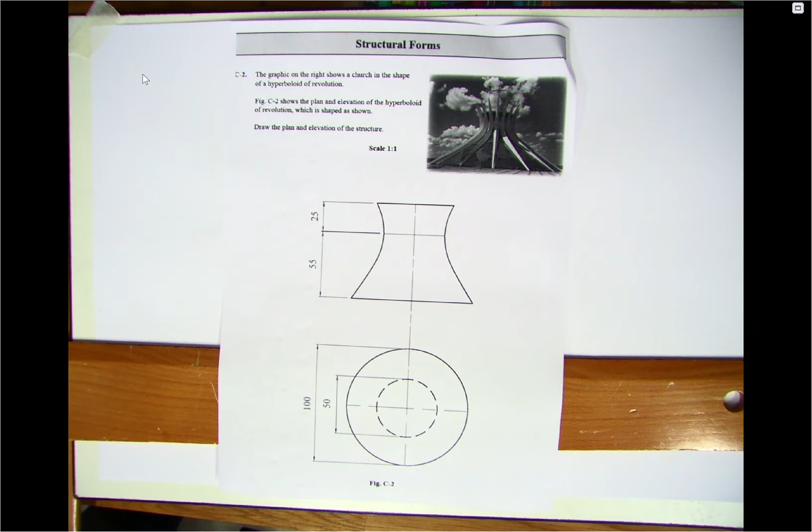Okay, so this is today's question. It's again a hyperboloid of revolution. It's an ordinary level standard one typically, but this is quite common at higher level in that they give you a hyperboloid of revolution that doesn't go up the full way. It's been cut off or it's slightly shortened. There's a few common mistakes that people make. So we'll start off anyway.

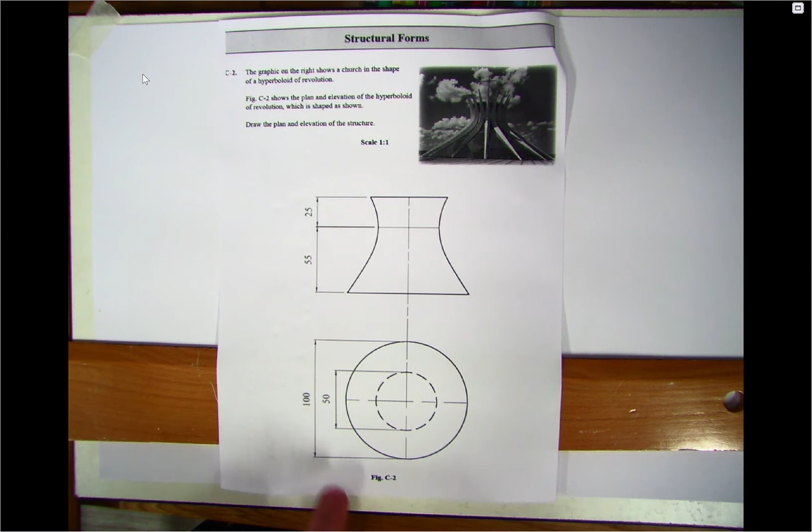We have 50 here for our hidden circle or throat circle. We have 100 here for our outside circle, and we're also missing a circle here, which we'll come back to and make sure that we don't forget to put in at the end. So obviously half of 50 is 25, so we need radius 25, and half of 100 is 50. So I suppose we'll do the bigger one first.

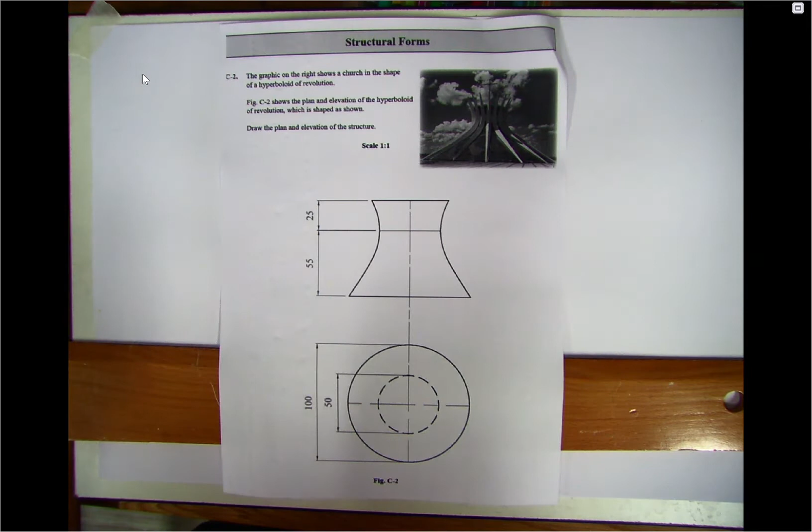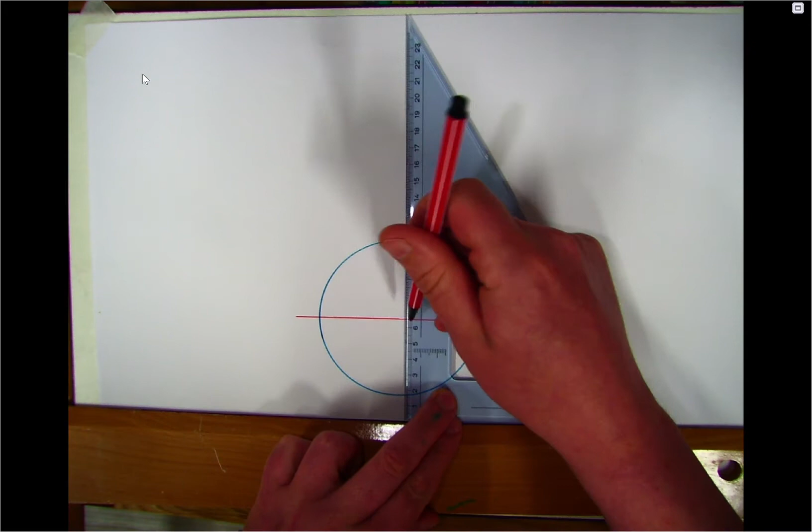So here I'm just setting my compass at the back to 50. Okay, so we pull it about here, and let's zoom in after that. Okay, so there's my center point, so I'll draw my crosshairs. Okay, and then we set it to 25, and we'll draw our hidden detail.

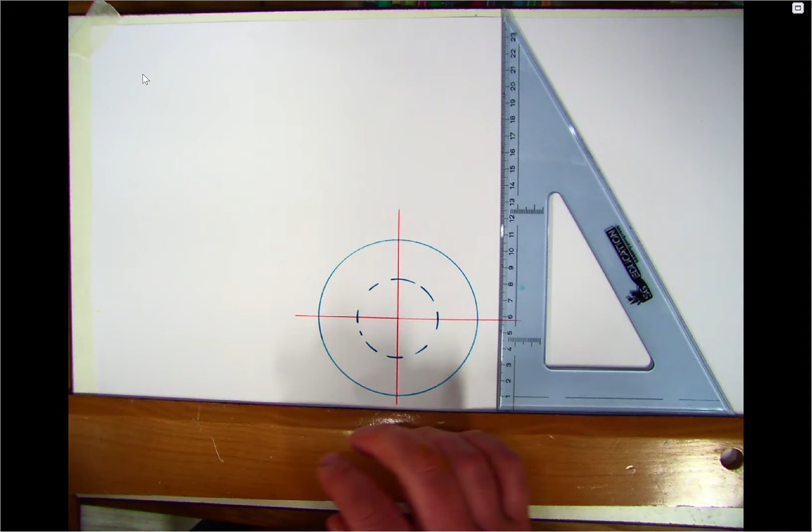Now we know from the plan view that this is hidden detail at this stage. So what we'll do is we'll try to get it as accurate as we can and make sure that they hit the two edges of the crosshairs on left and right so that I can bring up those points. So the most accurate way to bring this up is by using the outside edges.

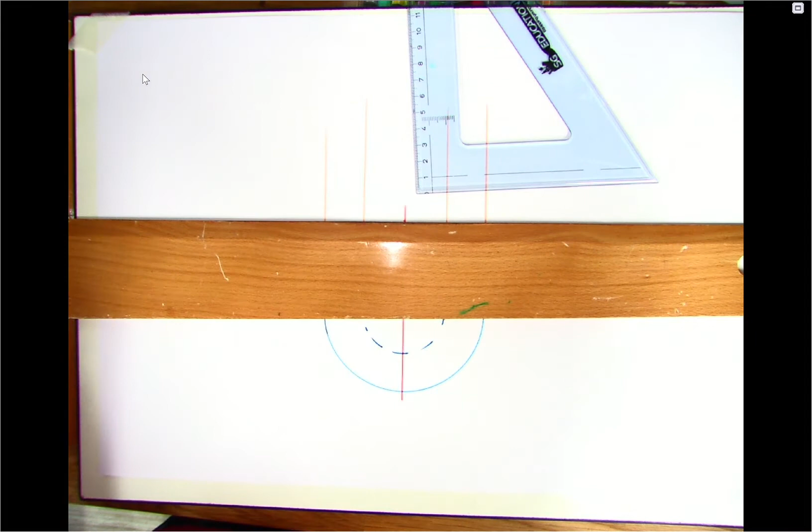Okay, so typically what we do is we draw the plan first and then we draw this too. So we're going to leave a gap of maybe about 10 there to draw my ground line, and then the heights that we have are 55 and 25 in this case. Okay, and 55 and 25 is 80. So what I'll do is I'll draw that there. I'll just do that much first.

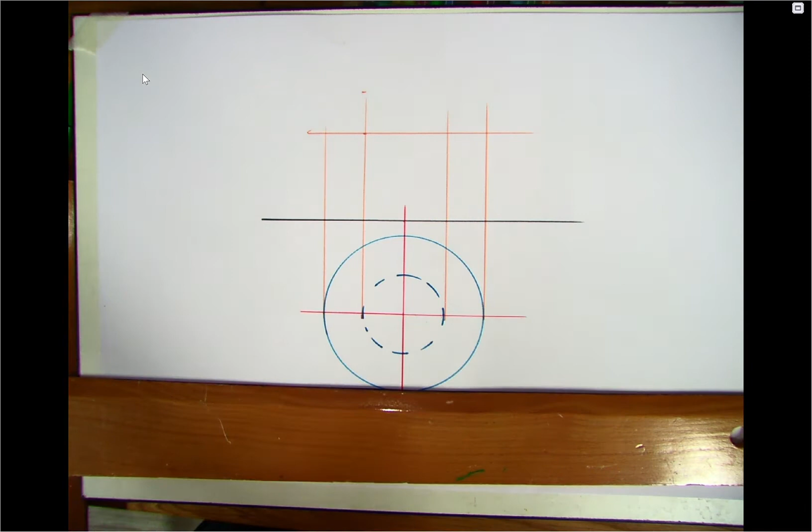This is my mark for my top part, so I'll just explain. There's various ways of doing this, so I'll try to explain all the different ways. So if I look here, basically I should have a gap of 25 here. So because it's even, I wouldn't use the dividing line method. However, especially if this is higher level, I probably would just do it on one side just to show that I have it done. But for today, we're not going to do it just to speed up the video a bit.

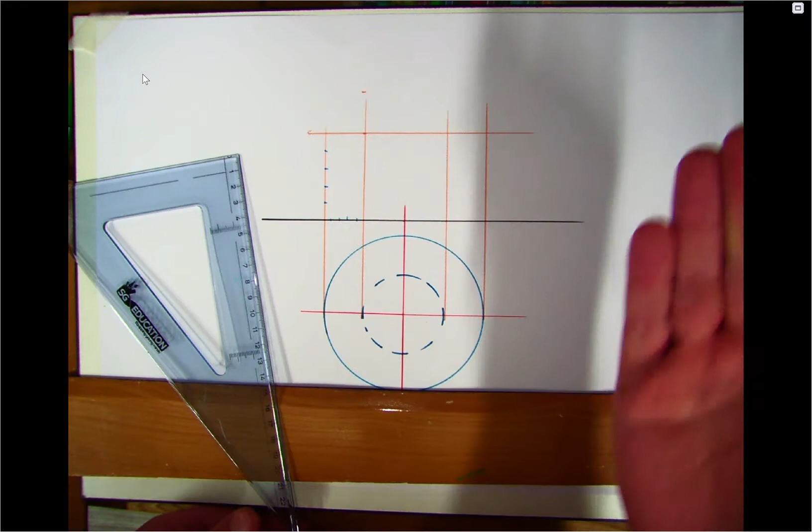So 5, 10, 15, 20 this way, and then this is 55 high. So again, 55 divides evenly by 5, so it gives us 11. So again, it's 11, 22, 33, 44. Again, I'd probably use the dividing line method on one of those sides just to show in case there'll be a mark for it. But basically, this here now is my V1 and my V2 point. So this point is important and this is important.

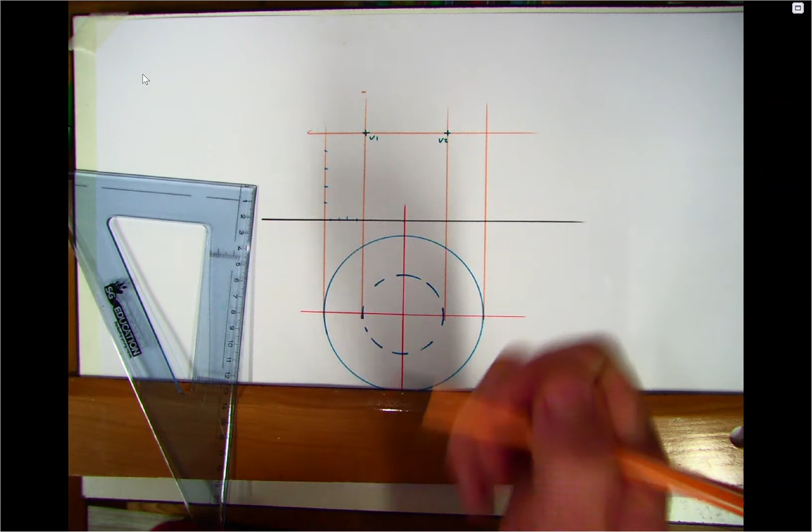And one of the important things here is this is the rectangle that you're using. Often students accidentally try to split the whole bit here. Now, what I would usually say, as you've heard me say in class, is that I've never really thought about which one goes to which, because if I accidentally join these to V1 and join these to V2, they won't cross. So it must be the other way around. It must be these going to V2 and these ones here going to V1.

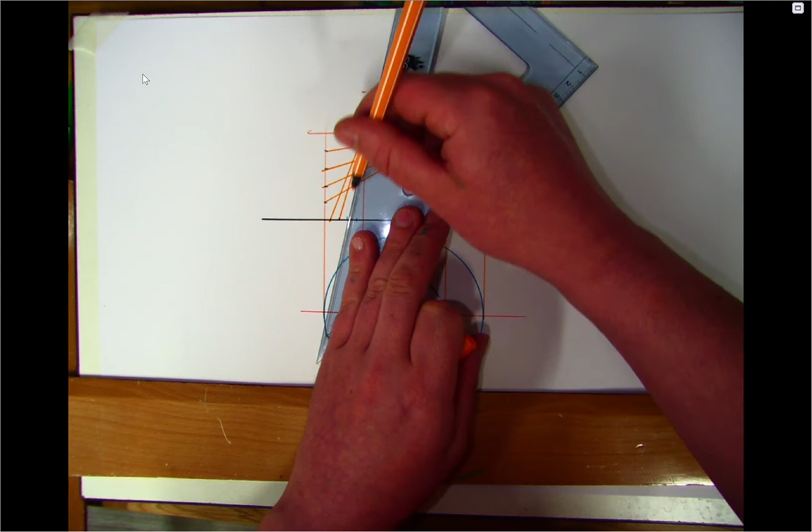So this is the rectangle method for doing a hyperbola. There are two alternative methods for solving this, but this is the one I think is quickest and easiest, and usually it's the one students pick up the handiest. So I'll mark my various points so I can number these 1, 2, 3, 4, 1, let's see, that's wrong, 4, 3, 2, 1, so 1 and 1 cross giving a point, 2 and 2, 3 and 3, 4 and 4.

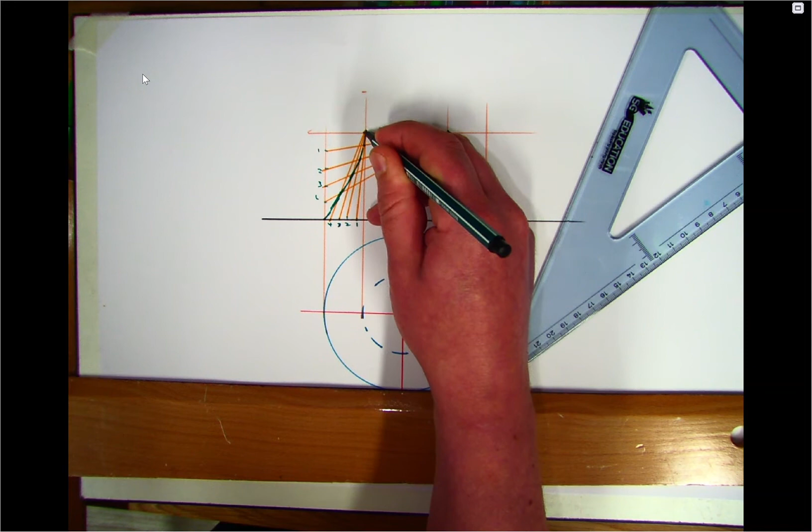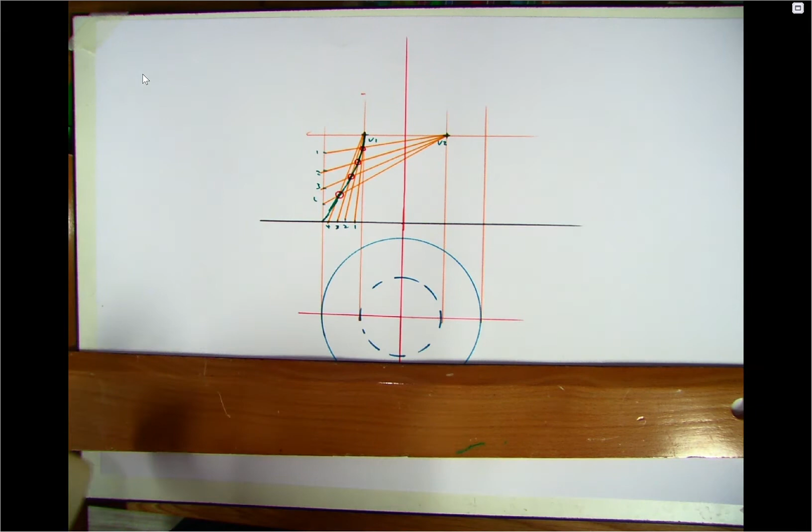And that's like that. Okay, so I might just highlight these points here because I want to show them for my other side. Now, there's a few different ways in terms of solving. I could repeat the same on the opposite side. However, what I could also do, sorry, let's put a bit more tape there, is I could mirror across. Basically, a hyperboloid of revolution is exactly the same on the top as the bottom and exactly the same on the left as the right. So I'm going to just draw these lines here, up and straight across.

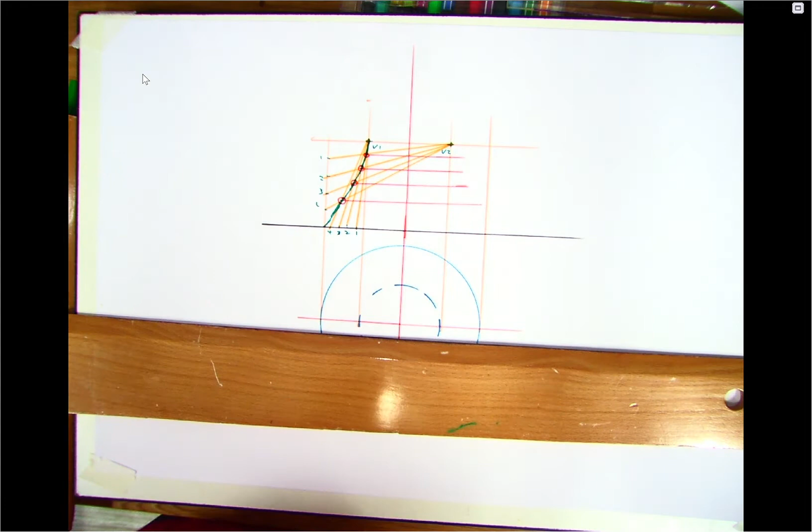Okay, and the reason the mirror method is good to get used to is because it can be used to solve the top part in this case, particularly if the question isn't even. So that's the same distance on this side. As I said, this is completely up to yourself. You could use the same method as we used on the left hand side on the right hand side. No problem with that.

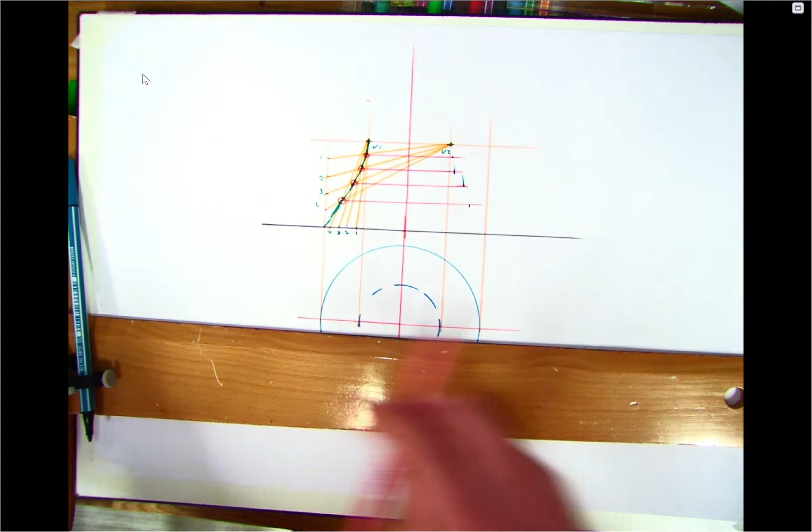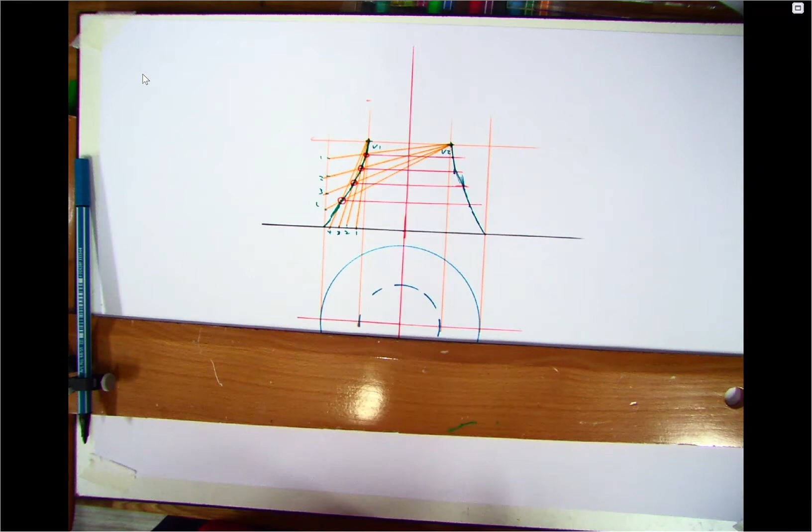Okay. So we have our various points there, and now we can sketch this in. Okay, so the reason I showed that is because pretty much to solve the top, that's what you need to do, right? So I'll show you slightly in this corner an alternative way of solving the top, but it would take up more space. So we knew that if we came up 25 more, that's going to be the top of my hyperboloid. We'll draw a line for that there.

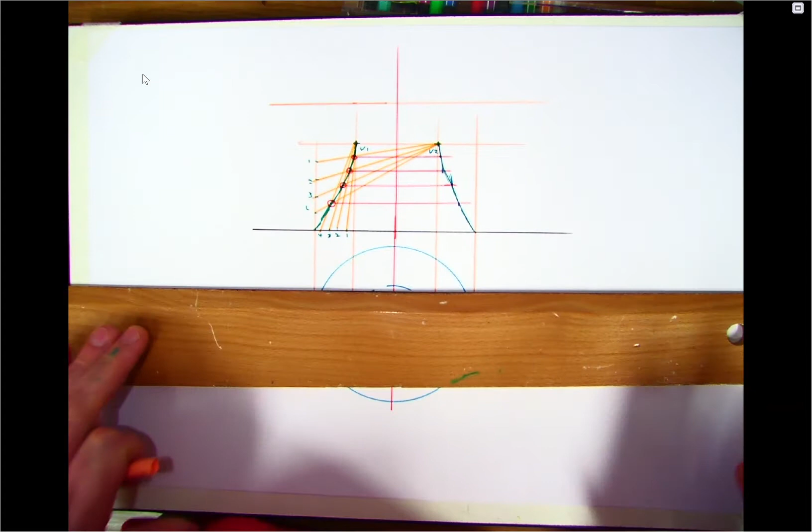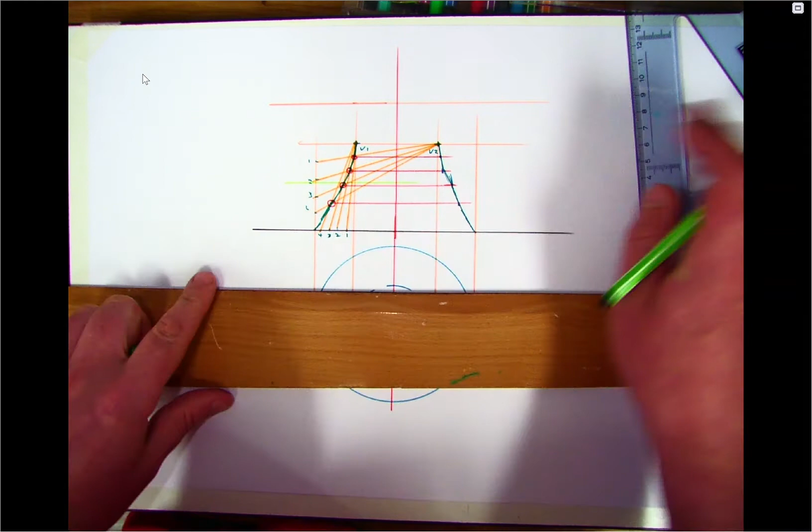So if we came up 25, we actually need to know the exact point here. So what they would expect me to do in the exam is also come back down 25. So I have to draw a line here. Right? So that gives me that point there. And if I bring that up, that gives me the exact curve. So my curve is literally going to be sketching from there to there, but I have to show that I found the point in here to get full marks for that part there.

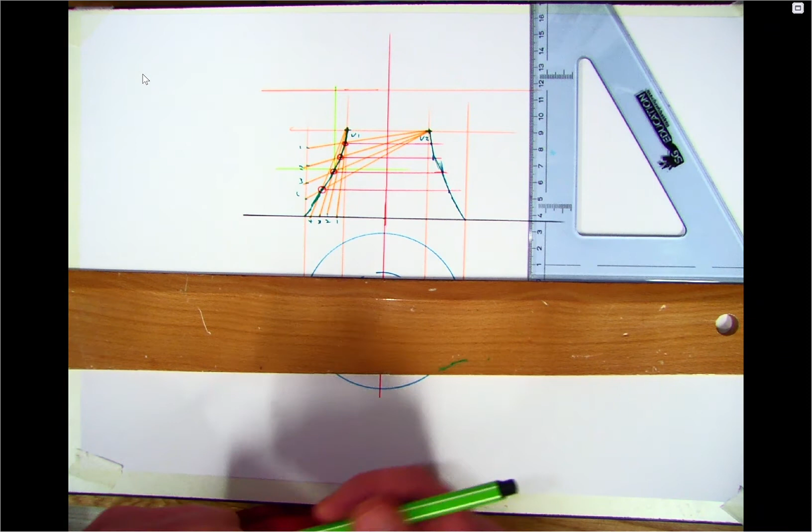So what I can do actually at this stage, if I wanted to, that's going to be the outside edge. So one of the lines that is missing in plan, and this is the top of the surface. So I can draw that and you'll see that in a second. If that's a little bit confusing for the minute, don't worry about it. So really all I need is another 2 points. So I have this one and I have this one. And again what I'll do is with my compass, let's see if that one might not be up high enough. With my compass, I'll take my distances.

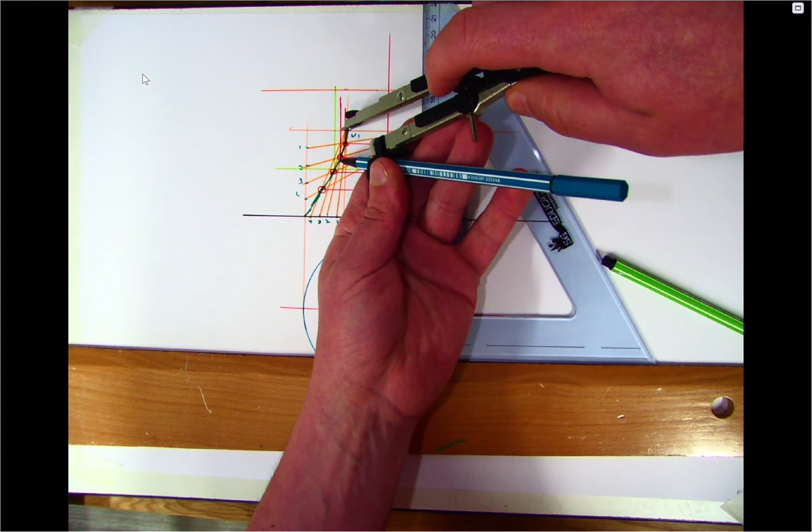And again, because it's a mirror image on the top, there we go. There we go. So now I have all my points for that side. I can sketch that in. And again, the examiner would be expected to see that. And there's my left hand side completed. Okay, so I mirrored these up. As I said, I couldn't use this method, right, as it stands.

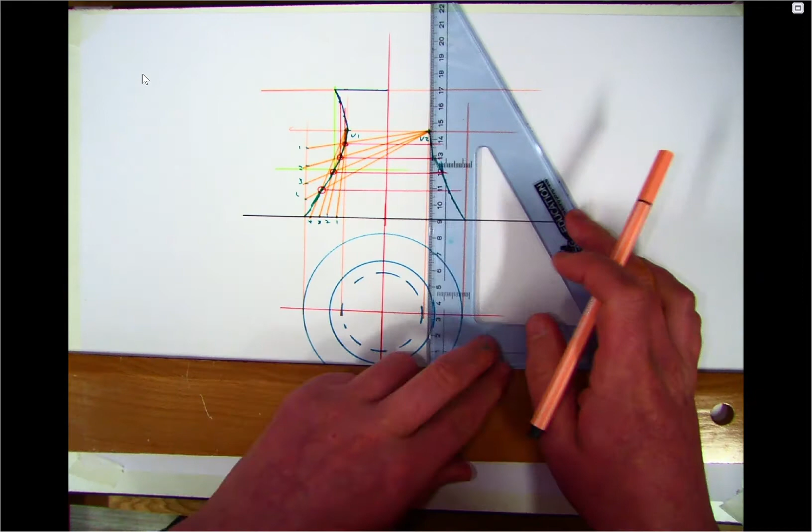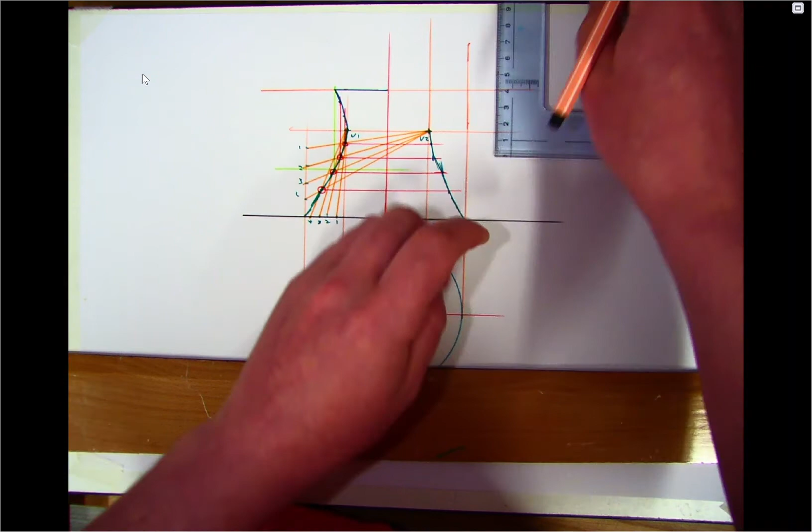Now, if I was hell-bent on using this method, or if I'd forgotten on the day about the mirror method, I can use this, but it is critical that you don't get confused. So this is not typically the way I would do it, but just so people can see how you could do it if you wanted to. What I've done there is I've made the exact same size rectangle here. So I've measured up 55, which is the same as this. So basically this rectangle here is exactly the same as what I had. Right, maybe I'll highlight that in this light grey. So I have to make the exact same rectangle above as I had below.

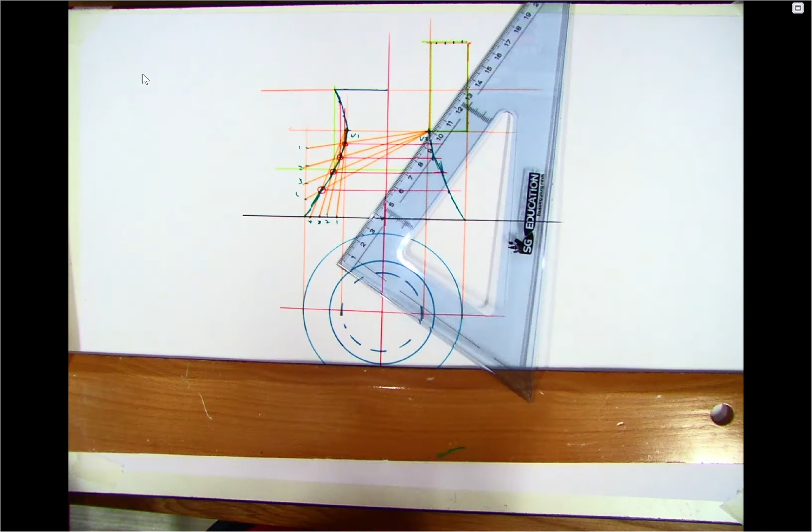What most students will do is they'll get confused and they'll split this into 5 and split this into 5. And so their curve will come around the full way out to there, which is incorrect. So if I do that, I can then do exactly the same as what I did here, but just the opposite way around. So the 5 apart will be on the top. So 5, 10, 15, 20. And because it's the opposite side down, these would go to V2. And again, this will be 55. Then it'll be 11, 22, 33, and 44. And these are the opposite way, these will go to V1.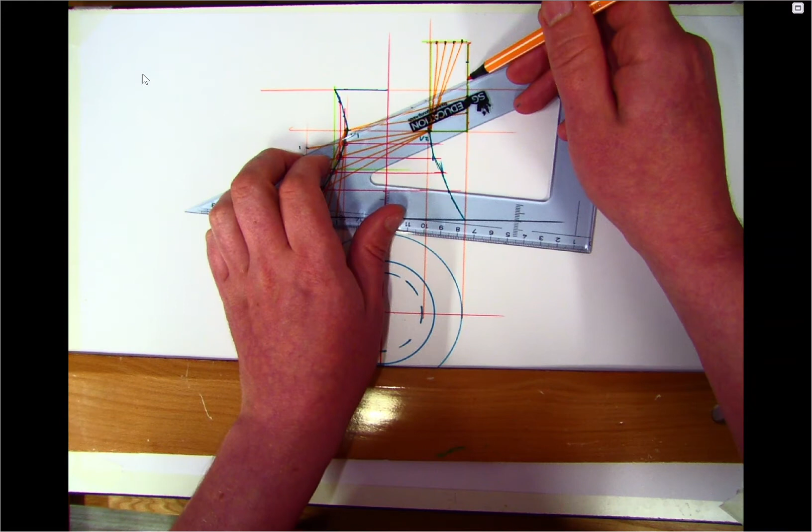So this is an alternative way. I'll just prove that it's symmetrical, but I would be less likely to use this method for this question. So 1, 2, 3, 4. So there's my 4 points. Now I'll just sketch them in maybe in a lighter blue, because it's going to be cut off. Okay. So there's my question. This would be this part here, and again that should technically be symmetrical of that. So you can use this method, but you have to draw the full rectangle, not just part of a rectangle.

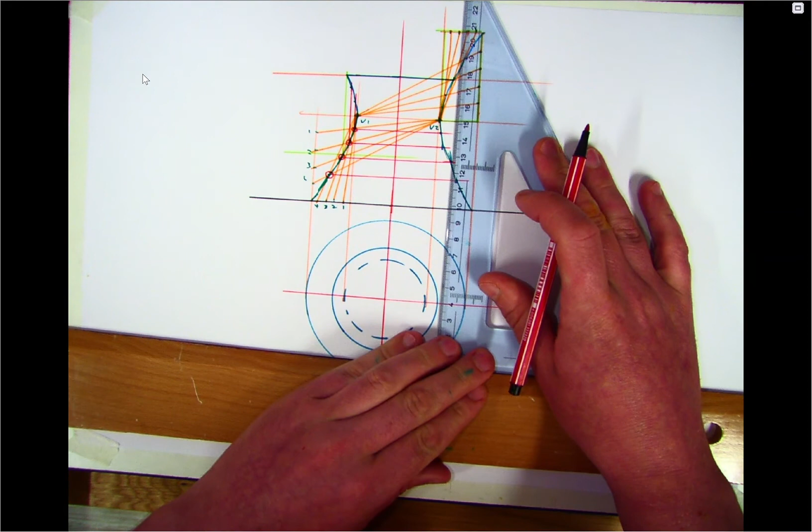And again, if I bring this point here down, right, 90 degrees and straight, you'll see that that would line up with that. Okay, and that will give you that, and you can draw your circle. So this circle here is basically the top view of this, and that's another acceptable way of doing it.